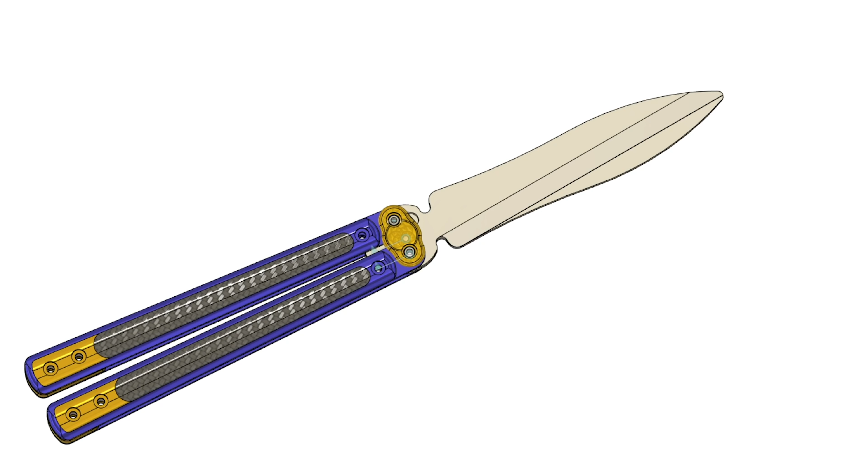Hey everybody, it's time to finish the Baliscissors. I still need to make the blades.

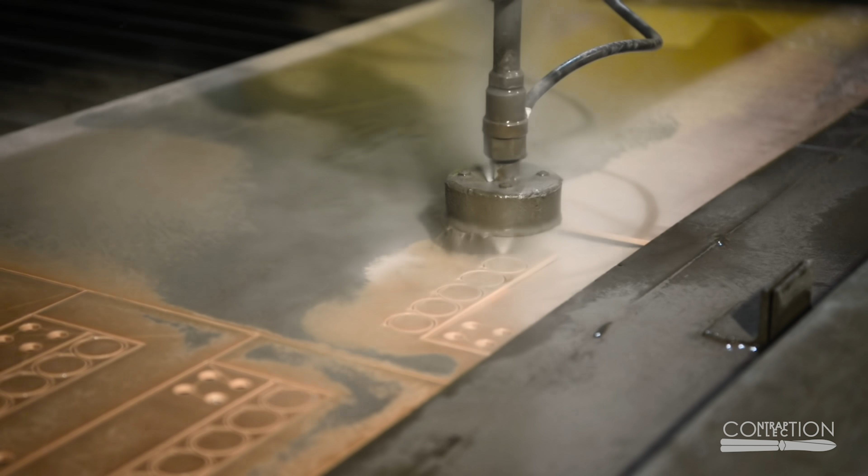I'm again starting with the first op in a vise. I think I might want to get the blades water jet cut too, so it's not worth designing a fixture for the first op. I just want to get this prototype done so I don't order water jet blanks for a design that turns out not to work. Here I'm cutting the area where the spring is held for the button.

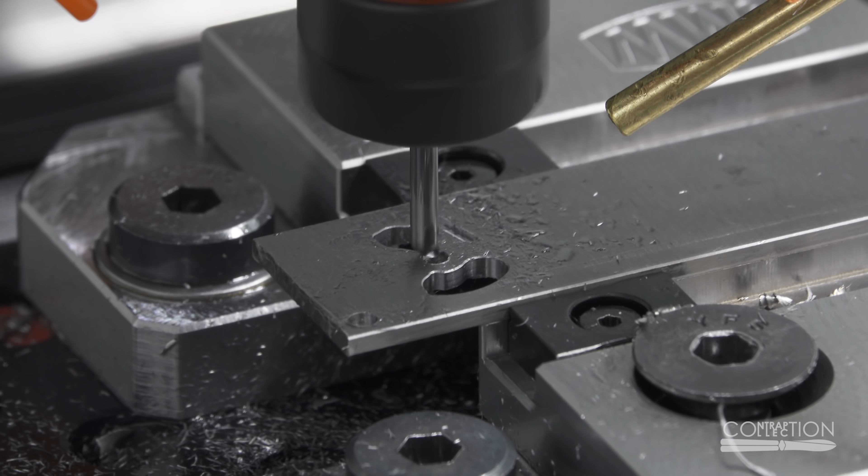I again designed a fixture that uses two blades to make clamping easier, so I run a second blade. But this one has a smaller center hole, so it can be a press fit for a pin. There is something that makes this fixture a little bit more complex than my last blade fixture. I'll explain why in a second.

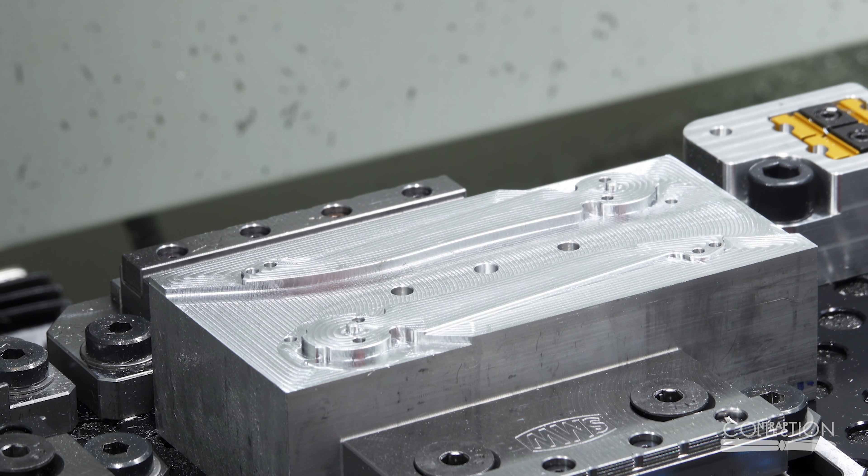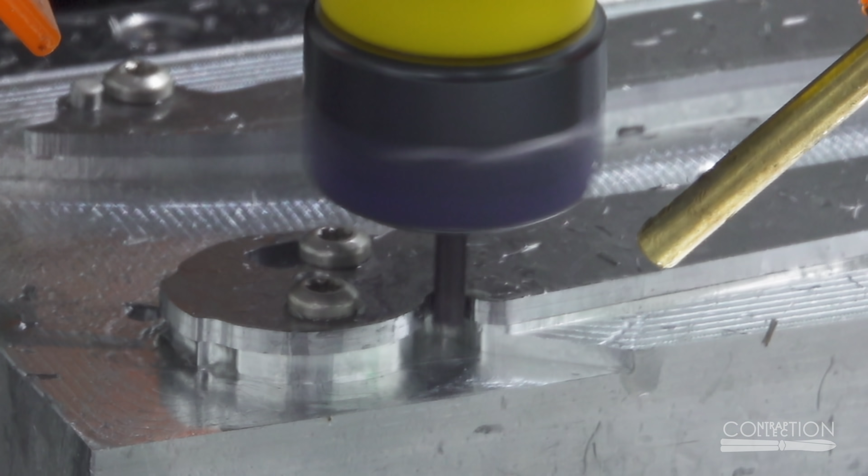First, I mill away the extra material. Then I get into tighter spots with an 1/8 inch end mill. I use a bottom deburring tool where I can.

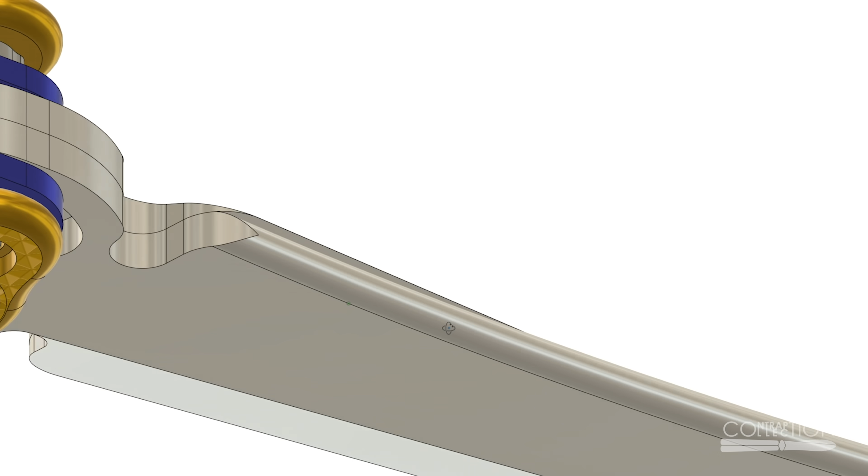Here's where it's different. There's this big canyon in the fixture because I wanted to try rounding over the spine of the blade. But if I rounded over the edge of the blade fully, I'd end up with an ugly gap here. So I had to make a custom toolpath to have the round over taper out.

The next step is to clamp down the blades and remove the screws so the tab can be milled away. Then the bevel can be machined. Last time I used a chamfer mill to machine the bevel. This time I use a ball mill because of course I have to make everything as difficult as possible.

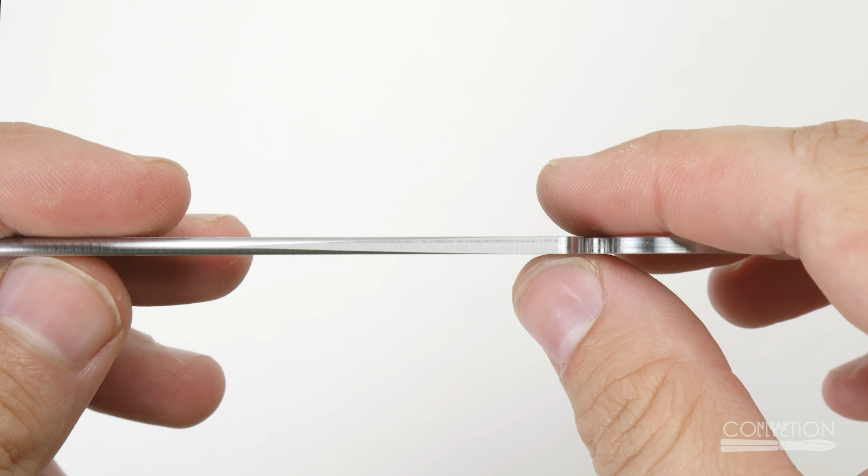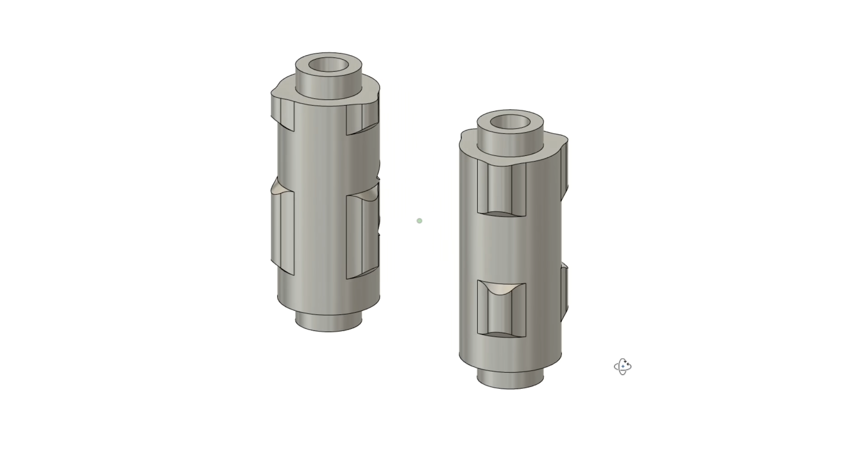There's a little material left over from the tab, but that can be filed away. The edge isn't perfect, but that's okay, and that's why I put the tab on this side, because this edge will need to be sharpened by hand anyway. A couple videos ago, I said I should find someone else to make the pins, and I got a few offers, and I was able to make a deal with one of them and get these pins.

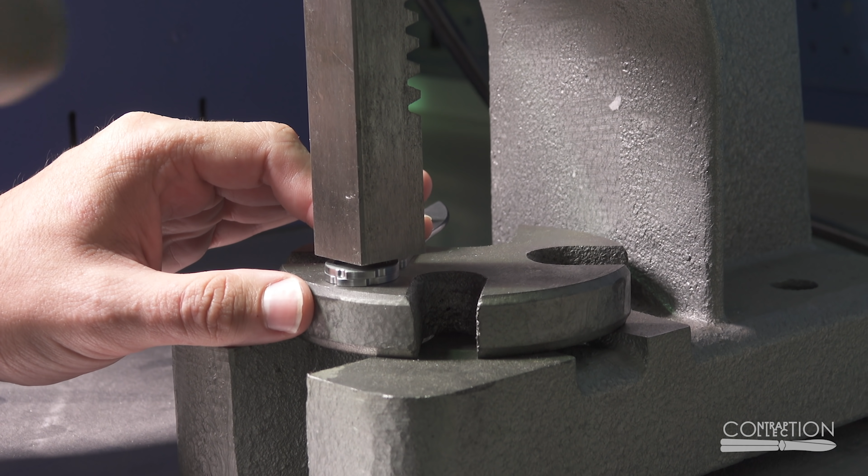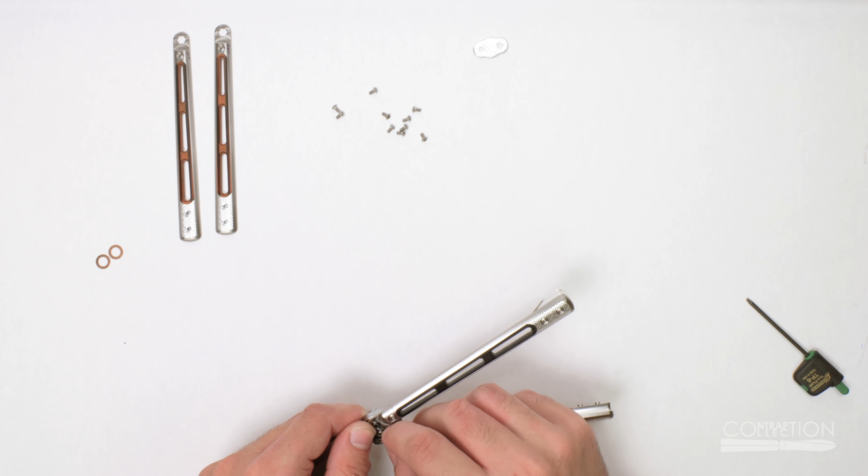Alright, let's put some scissors together. The first step is to press a dowel pin into one of the blades. I used the blade with a looser fit as a guide. Next, I cut and bend springs. It's tricky to get them into place. Eventually I get everything together. But, as I feared, the button was very stiff.

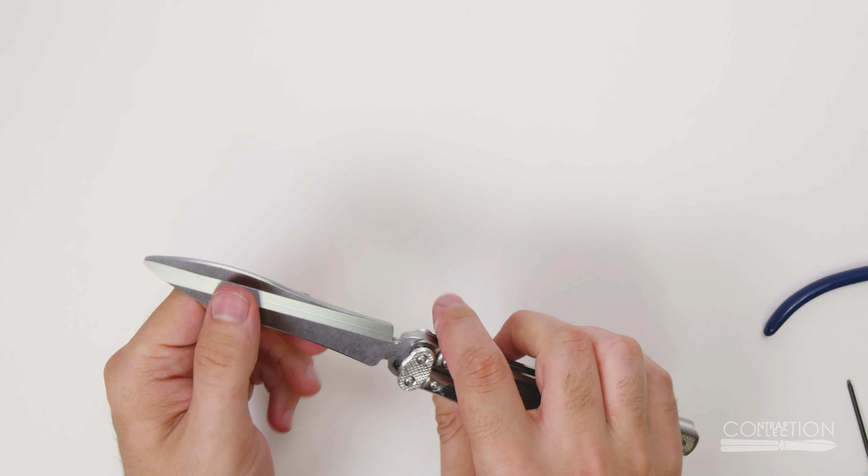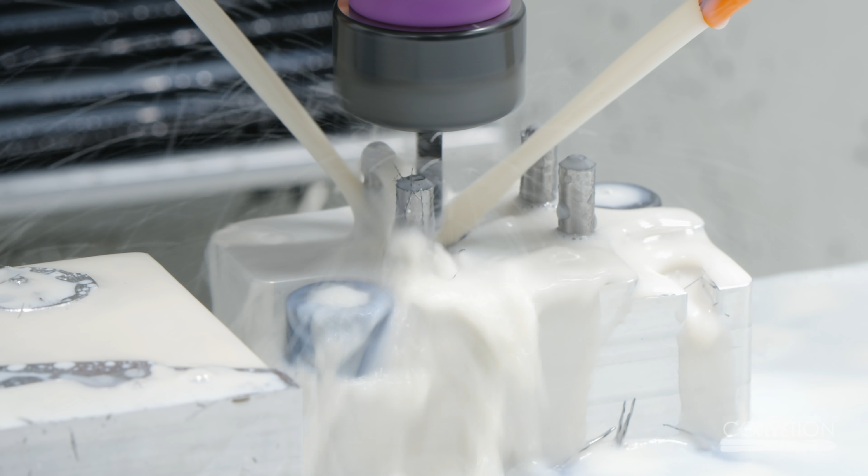In order to compare, I made more blades for the other handles. I tried thinner spring wire, but the button was still too stiff. The next thing to try was a different groove depth, which means making more pins myself. I bought some cheap dowels to use as stock. My problems drilling became a non-issue with coolant.

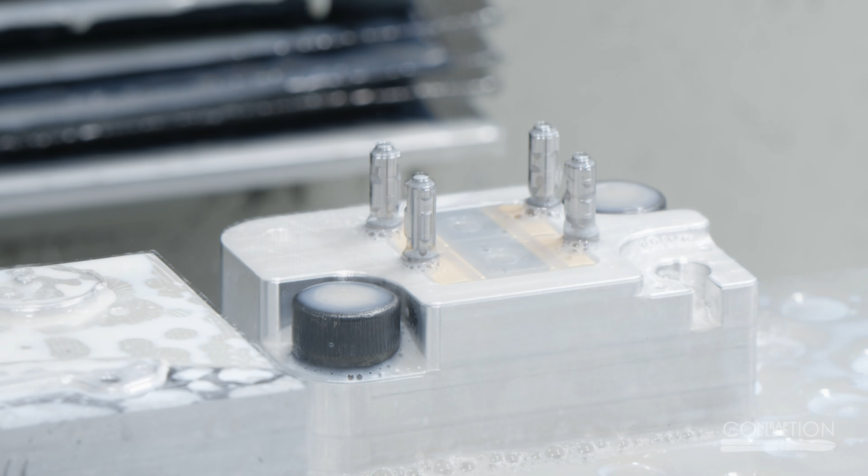The good thing about making 4 at a time is I can make 2 sets of different groove depths. I tried several things, and they kept feeling too stiff. Eventually, I felt like I should just try to get one that's too light. And it ended up being close to what I wanted. I redesigned the spring area to be simpler and shallower for a thinner wire.

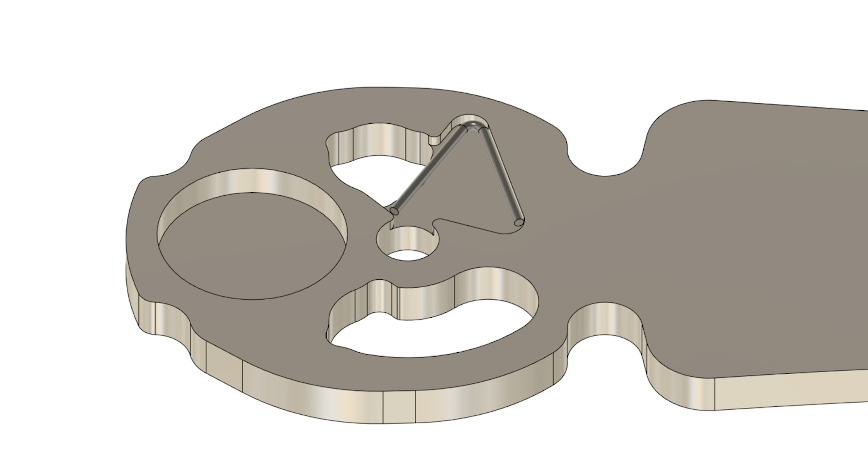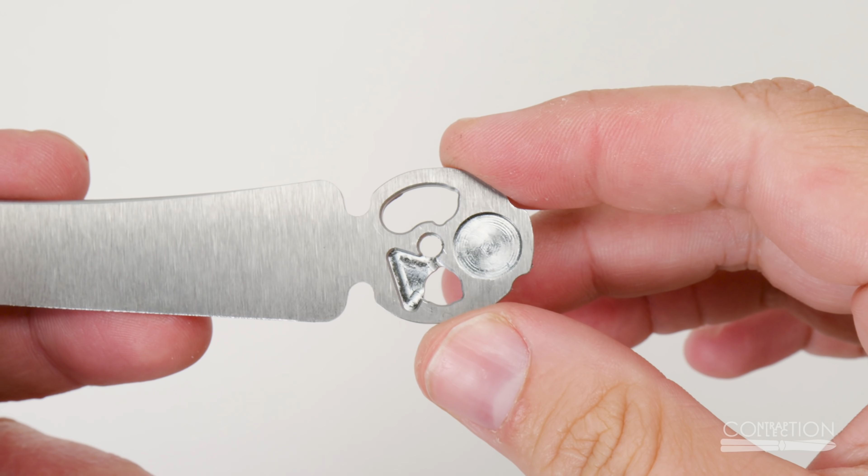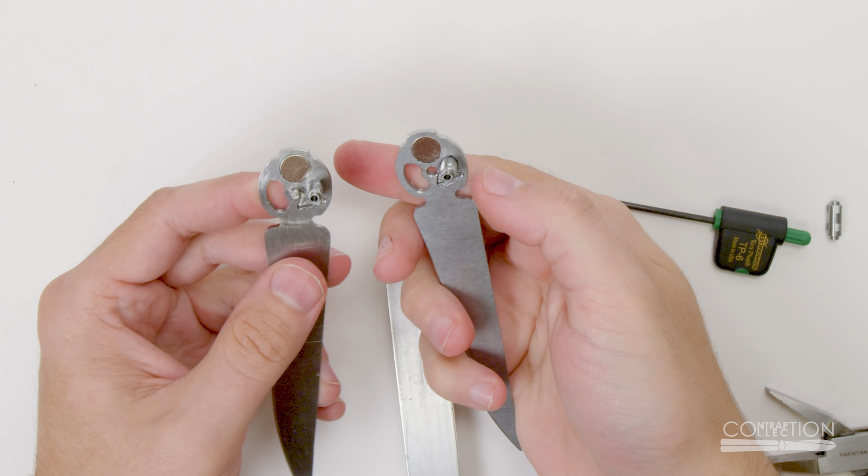And while I was at it, there was one more thing I wanted to try. That's right, I'm trying magnets again, and it works pretty good. This is unhardened and unsharpened, and it works as scissors. I'm very happy with this.

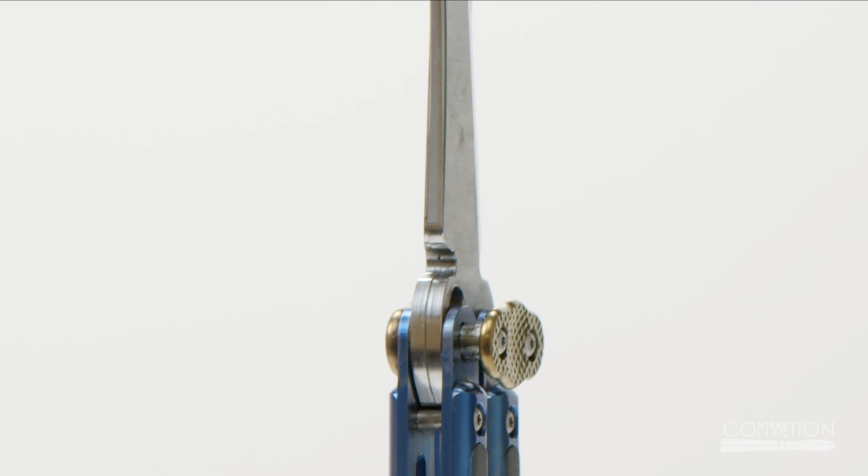This is the first time the Baliscissors have really felt real. It's not perfect, but I feel like I keep making huge improvements. And I'm happy people are enjoying the videos showing the process. I'm not the best flipper, but I'm trying to get better. It's flippable, but some things are loose and some things are tight. It needs some fine tuning.

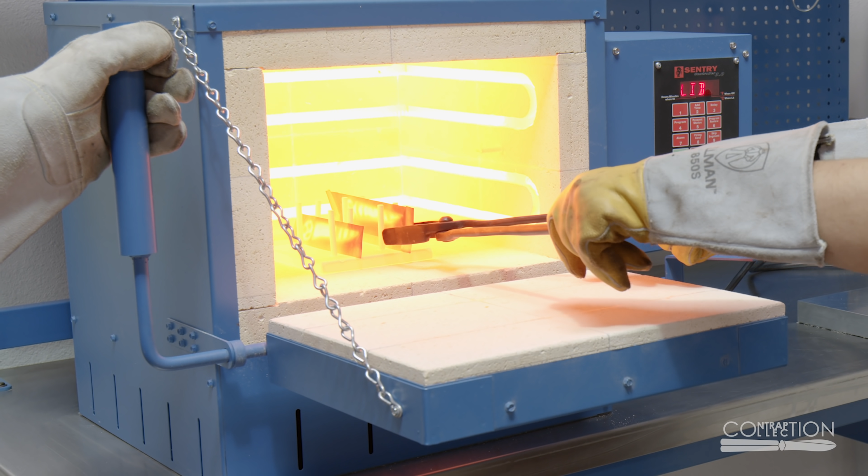I often get comments saying, "Cool, where do I buy it?" Or "Can I pre-order?" This is very flattering. I think it would be awesome to see my scissors in the hands of other people, but I want to make sure they're really good before I do that. And I don't feel like they're done yet. I do want to heat treat the blades. And there are many other things I want to do before I sell a pair.

I've been working on a way to explain everything that I still need to figure out, but I've decided to make it its own video. I try to upload every month, but this next video should be sooner. The video that will come after that is a mystery even to me, but I'm optimistic there will be more cool things to show.